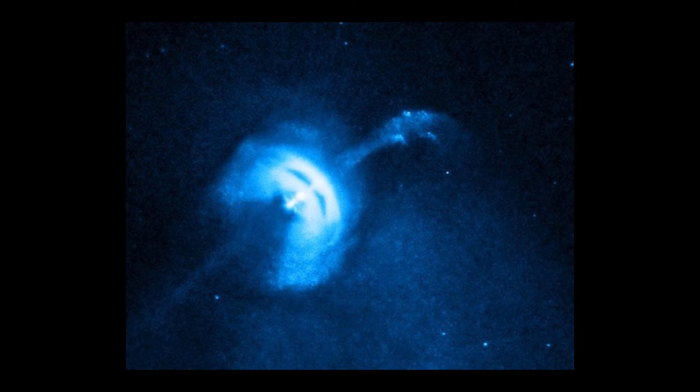It was the largest radar-capable telescope in the world and was responsible for numerous advancements in humanity's understanding of our place in the universe. But on December 1st, 2020, the entire cable system failed. Fortunately, though there were workers on site and nearby, nobody was injured. But the destruction of such an important monument to humanity's scientific discovery would have far-reaching consequences.

The Arecibo radio telescope apparatus is held up by 3 sets of 6 cables named according to their position on a clock, 4, 8, and 12. The cables are comprised of steel wires with a complicated drying apparatus to slow the process of corrosion. These cables are held in place by Spelter sockets, which are made by splaying out the wires comprising each cable, pouring molten zinc into a mold, which then sets and allows the cable to be held in place securely.

The first cable failure in August of 2020 raised significant alarm amongst the scientific community and prompted multiple reports that suggested many different ways of servicing and maintaining the telescope to ensure that it could remain active in the scientific community. Unfortunately, the proposed solutions would have come at a tremendous safety risk. As such, most engineering firms recommended demolishing the telescope carefully.

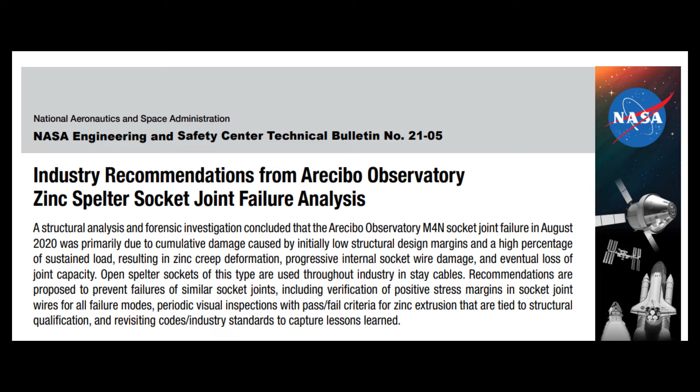The exact nature of the failure is explored extensively in a NASA report. This report identifies the main core of the failure being a cable pulling out of its Spelter socket, which caused further dynamic loading and resulted in the remaining cables also pulling out of their sockets. The NASA report reviews the design and features of the cable system, including these images of the overall structure, as well as the composition of individual cables.

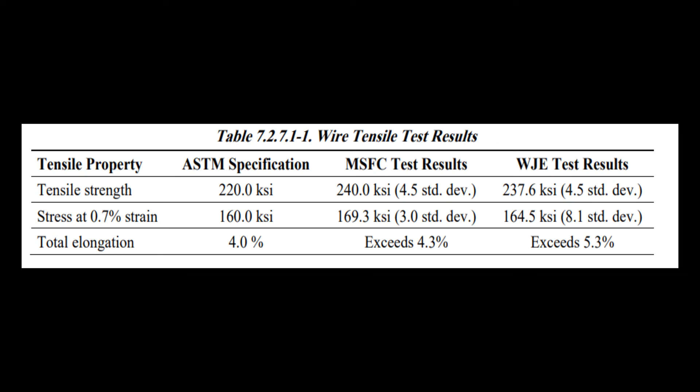Each cable consists of 126 quarter-inch diameter steel wires wrapped around a single 7-wire strand in 6 concentric rings. Each individual wire has a specified minimum yield strength of 160 ksi, minimum ultimate tensile strength of 220 ksi, and elastic modulus of 23,000 ksi.

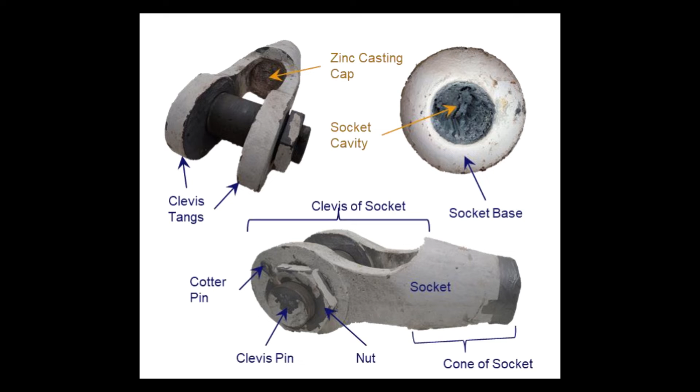The Spelter socket was comprised of a clevis-tang joint combined with an open socket type Spelter socket that held the individual wires making up each cable in place by means of high-grade zinc. These figures show the microstructure of both the solidified zinc in the Spelter socket as well as the steel cables.

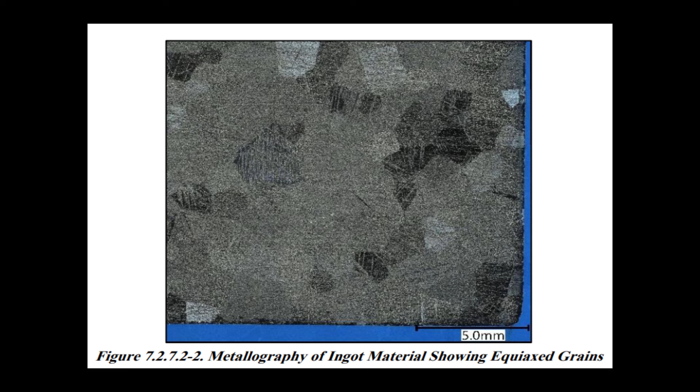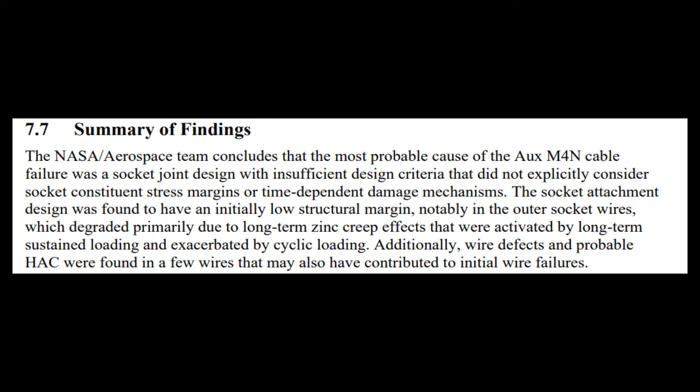The NASA report examines many causes of failure, among them corrosion, faulty design requirements such as factors of safety, and long-term stresses causing creep failure. The NASA report states that design criteria had a 1.83 factor of safety on rated breaking strength without consideration for constituent stress margins. Loads predictions reviewed after the failure indicate up to 15% higher than design criteria and a less than 1.6 factor of safety.

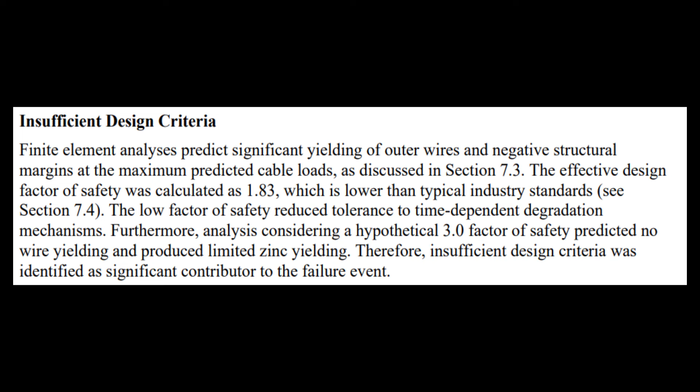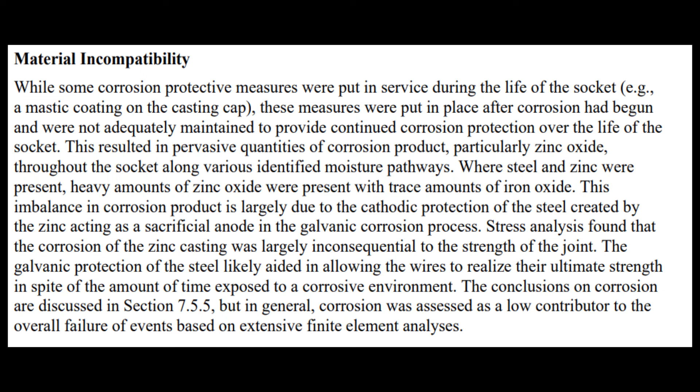Additionally, the sustained dead load versus total load is significantly higher than for typical open socket terminations in bridges, hoists, etc. The NASA report also states that as the casting cooled and solidified, shrinkage occurred between the casting cap and the socket cone inner diameter, leaving a gap along the insides of the zinc casting nearest the casting cap. Additionally, 8 wire ends were found to touch the socket cone inner diameter, which provided a pathway for moisture intrusion.

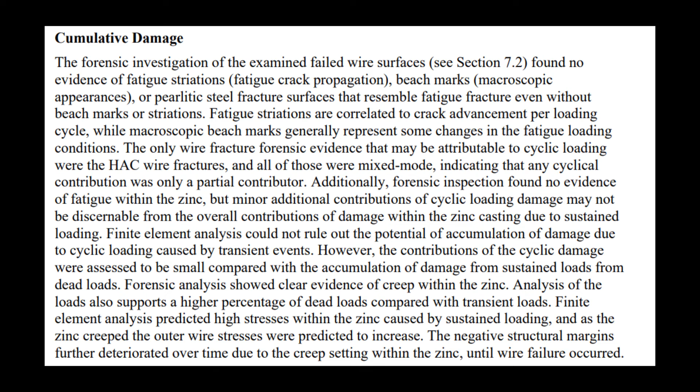Additionally, this report notes that design verification lacked specific testing of creep, cyclic loading, and worst-case workmanship conditions. Credible failure modes were unqualified in the Arecibo Observatory application. The NASA report defines creep deformation as a time-dependent failure mechanism dependent on temperature and load. Over that time, creep deformation is divided into 3 stages: primary, secondary, and tertiary.

In the primary stage, strain rate decreases with time and strain, which is due to strain hardening within the material. The secondary stage is characterized by the strain rate being relatively constant due to a balance of work hardening and annealing. This stage is typically the longest in duration, and no material strength is lost in this or the primary stage. In the tertiary stage, the strain rate increases exponentially, which is associated with internal cracking or cavitation and decreases the effective material area. This process eventually leads to failure, termed creep rupture.

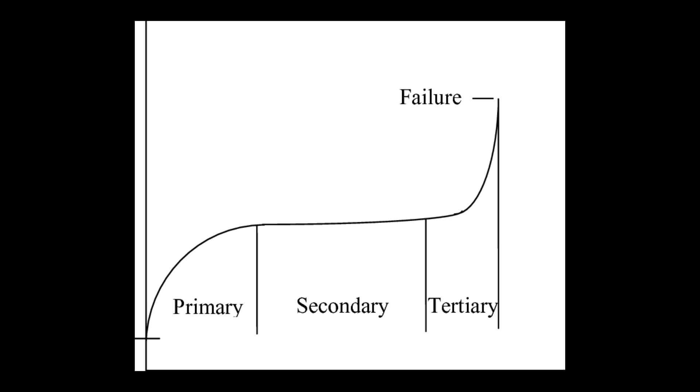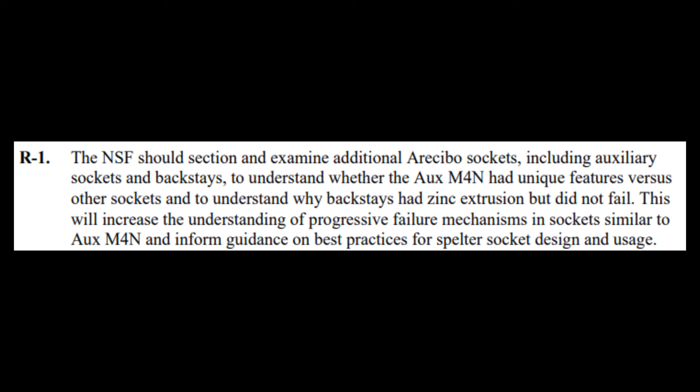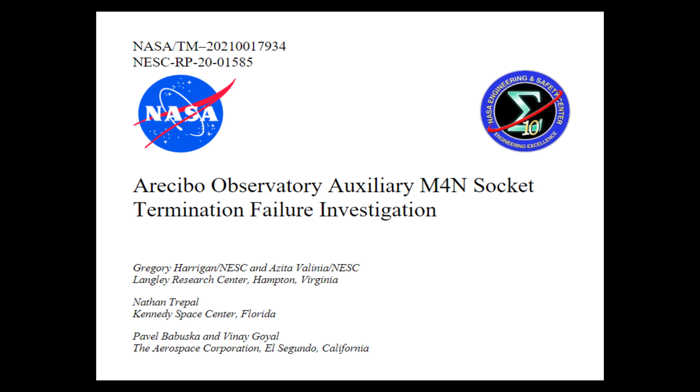It is my personal opinion that this creep failure was the primary cause of the overall Arecibo failure, which begs the question, what should we change for the future? NASA recommends in their report that further analysis should be conducted on the Arecibo sockets in order to better understand how Spelter sockets can fail, and more specifically, why some Spelter sockets in the Arecibo Observatory didn't fail and why others did. It is made clear from these notes from the NASA report that neglect in the design, as well as problems with the manufacturing, led to this disaster.